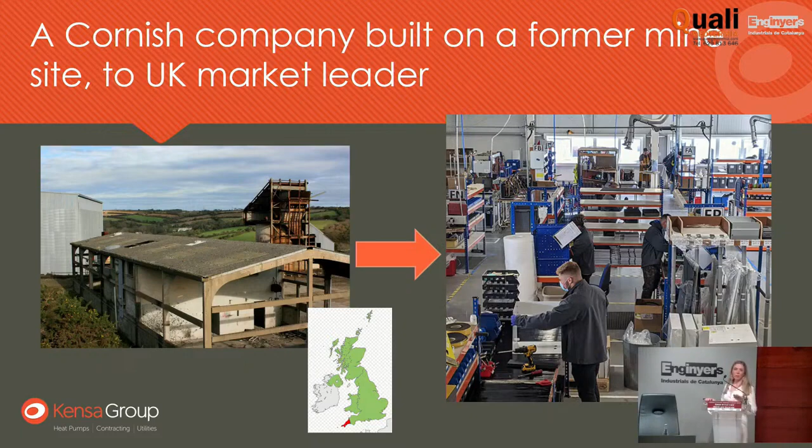So I work for a Cornish company, so we're right down on the very southwest of the UK, which meant I had a really long journey to get here because I live about 3 miles from this factory. Our factory in Cornwall, where we build ground source heat pumps, is on top of an old mine. There are a lot of mines in Cornwall, and that means that we're actually able to heat this new building that we've got on the site with water from the mines beneath it, which is actually really quite a cheap way of installing the infrastructure that you need for ground source heat pumps.

So the Kensa Group has 4 different companies. We've got our parent company. Kensa Heat Pumps is our manufacturing company. Now, we found, as many other people do, that if you put a heat pump into a house, you get a phone call saying, my heat pump doesn't work. But quite often, the issue is that the system has not been designed properly. It's not been installed properly. It's not been commissioned properly.

So Kensa Contracting was started so that we could do the design, the installation, and the commissioning, and that our customer had a single point of contact so that if anything goes wrong, they just speak to one person to get it fixed. The upfront cost of ground source heating is incredibly high.

Now, we want to reduce the barriers to uptake for this technology, and so Kensa Utilities was formed, and that's the part of the company that I work for. It's been created to fund, own, and maintain the ground array infrastructure that serves our heat pumps, and in that way we grow the market so that we can sell more heat pumps.

So Kensa started over 20 years ago. Initially, our market was the self-build market. That's probably very similar to the kind of installations that you have here on a regular basis in Catalonia, where it's individual properties. You've got people with quite a bit of money that care about the environment and that want to have the best heating available. So they install their own system. That's a very small market, and it doesn't help us solve the issues that we have of high carbon consumption.

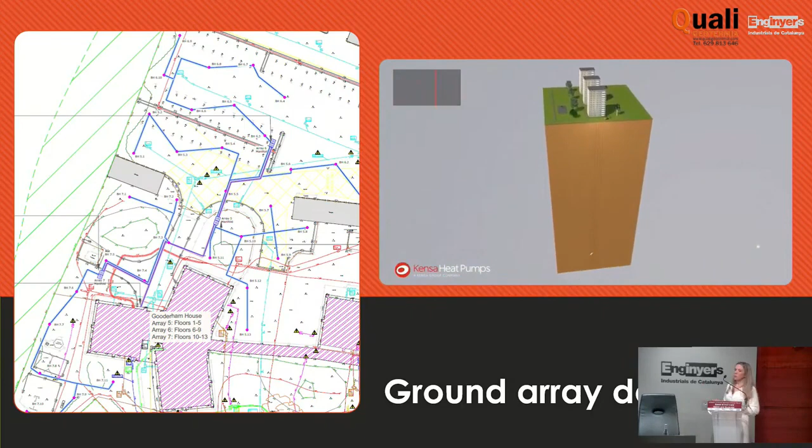They're incredibly deep boreholes, these ones. They're well over 200 meters because there's not very much open space and an awful lot of flats. And to give you some idea of the scale, this graphic on the right is actually a to-scale illustration of the depth of the boreholes compared to the height of the property. You know, we talk about 100 meters, 200 meters. It's actually a really, really long way down.

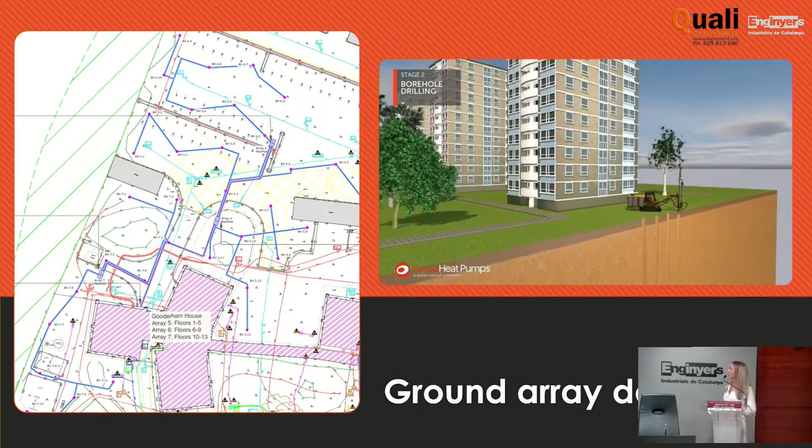Now, inside the building, you can see the feeder pipes are separated into 4 different arrays. And that means that we don't have to have a central pumping system on these pipes. So it reduces the maintenance cost and the ownership cost to the person that's managing this system. So you don't have to have an electricity supply to pump fluids around those arrays. And it makes the business model for this far more simple.

So the blocks of flats are separated into arrays. And you can see here there are 7 shoebox heat pumps, so that's our smallest heat pump, on each floor. That means there are 7 flats on each floor of these 3 blocks, and each array is serving between 4 and 5 floors of the building.

Most blocks of flats like this already have service risers, so we don't have to run pipes up the outside of the building. You can use the existing service risers, and we install insulated pipes up the centre of the building. Now, you've heard a lot about not insulating the pipes, and that's great when they're in the ground and they can gather heat. But once you come up out of the ground, if you don't insulate them, you end up with condensation on the pipes within the building, and you don't really want that. So the pipes up the service risers are all insulated.

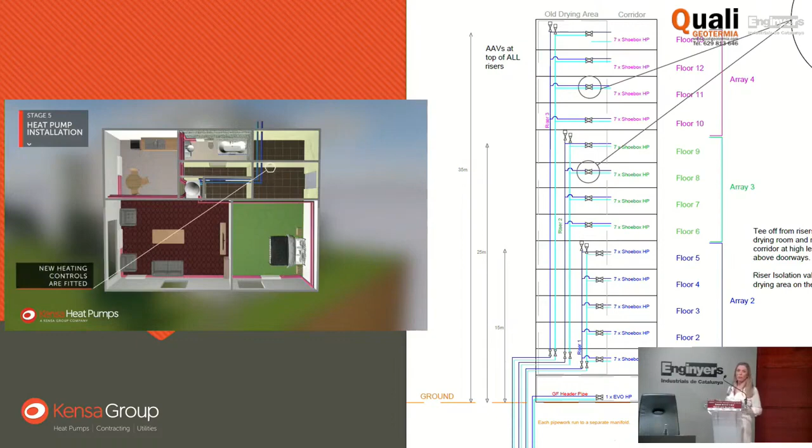But there are 5-way valves on each of these for every single flat, because when we fill these pipes with water, we have to pressurize the whole system. We have to pressure test it to make sure that there aren't any leaks before we switch it on. And it also means that we can isolate each individual section of that network. So if something goes wrong on one floor, it doesn't mean it has to affect all of them. And that's very important when you're looking at this kind of scale of project, because what you don't want is for the whole system to go down and to have 300 people without heat instead of 2.

So inside the house, these are images from this block of flats on the right here. That's our very small shoebox heat pump. It's a lot bigger than an actual shoebox, but it does genuinely fit under a kitchen sink. And that's really important when you're looking at high-density housing where space is at a premium.

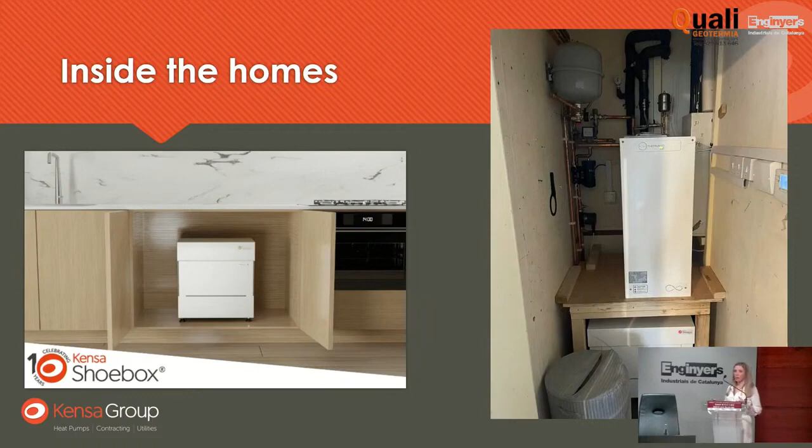On the right, the image is the shoebox heat pump underneath a phase change heat battery. So the heat battery on the right here is in place of a hot water cylinder, but it's about 1/3 of the size. So instead of using water for energy storage for your bath and your shower, it uses salt, which means that it can hold a lot more heat in a much smaller space. And again, it's really vital for smaller properties where space is expensive.

So this is the project in numbers, 273 flats across 3 blocks. That's a huge number of people that had their living conditions improved. These flats previously had electric storage heaters. So the people living in these houses have had their energy bills cut by more than half. And these are all lower income households, and that means we're taking them out of fuel poverty. They can actually afford to turn their heating on now, where many of them didn't before.

Also, with storage heaters, you have to remember to charge them at night to release heat in the day. It's not heat on demand. They can run out of heat, and so we had people that were cold in the evening. We know every single person in these blocks of flats is going to be able to have heat when they want it. There are 109 boreholes serving these flats. That's a very large amount, nearly 29 kilometres of drilling.

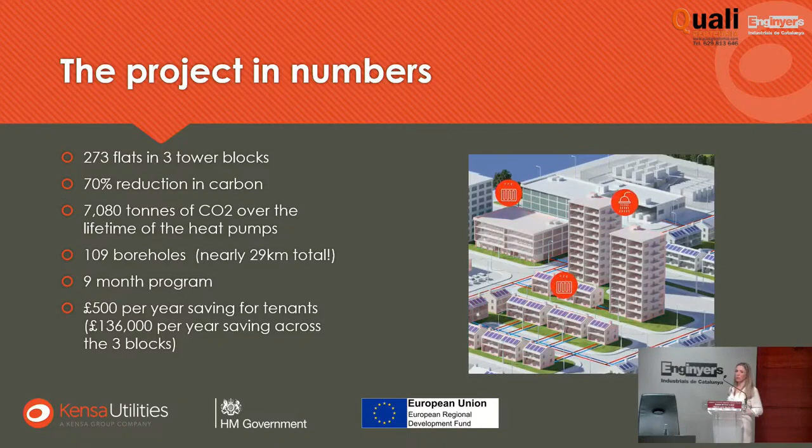The whole project is being done in 9 months, which is a fantastic feat of engineering. I think that's probably one of the most impressive parts of this project. And it'll save the residents £500 a year. And that is different to the way you would see it here. Our energy costs are higher than you have it in Catalonia, but it's still a reduction of over 50% to each of those households, which is £136,000 across the 3 tower blocks.

And this is just to bring it back to the fact that these are real people that have their lives improved. We've talked a lot about the engineering and why we might want to do it and why we might want to save the planet. And these are the actual people that are now able to heat their house and that couldn't before. We have them report that it's easy to use, it keeps their house warm, and it's much cheaper than the old system that we had.

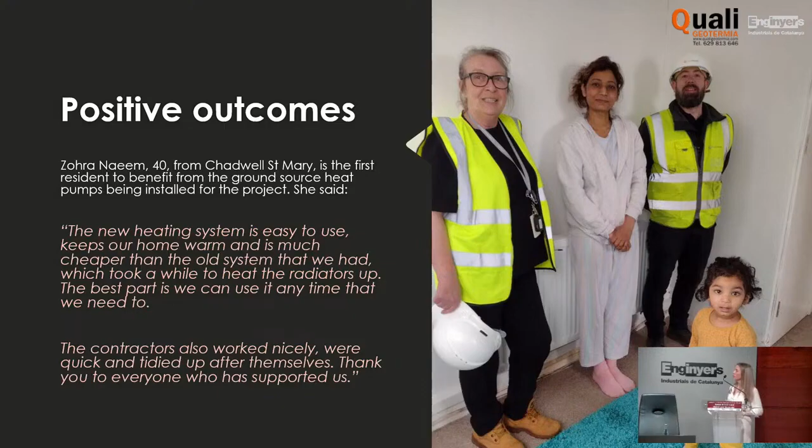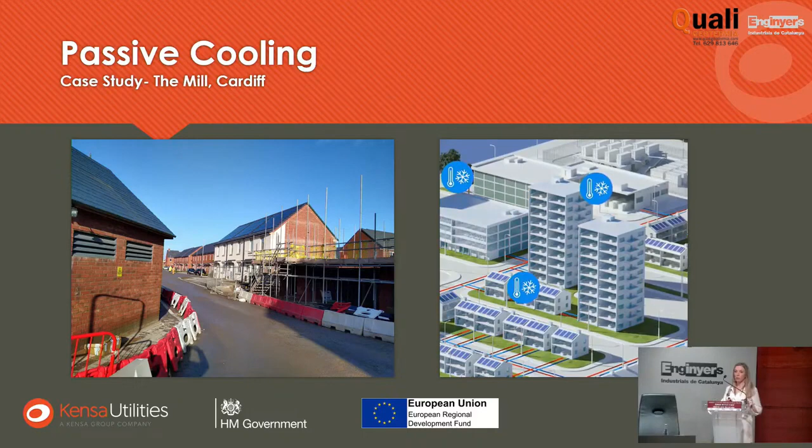This is from a new build development that we did, where we installed passive cooling in a property and a monitoring system to see how that behaved. So with passive cooling, you're just using the ground to cool the property. You're not using a heat pump. You're not switching the heat pump on to do this.

So we monitored this house between July and October last year, and it was through 2 heat waves, which won't sound very hot to you, but for us in England, it was incredibly hot. And it was at 32 degrees outside. Now, most homes in England don't have any cooling, so that is really quite warm. The room that we installed the cooling in was maintained at 21 degrees Celsius, and that's without turning the heat pump on. That's just using the ground and dumping the heat in the borehole.

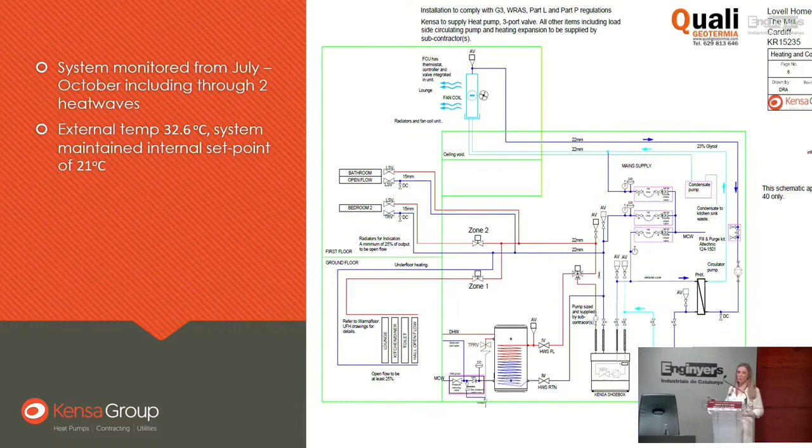And this is the unit that you require. This is just a plate heat exchanger on the bottom, a circulation pump for the ground side, and a circulation pump for the domestic side. It's ridiculously simple. So the running costs for a single room were £1.14 a day. To put that into perspective, if you were to cool the same room with air conditioning, it would be £4.25. So it's about a quarter of the price.

And the reason for that is that all you're doing is running 3 pumps, 3 motors rather. You've got these 2 circulation pumps, and then you've got the fan coil unit. That's the only energy it requires. If you were to cool the whole house over this period, it would have been £378 with this model, and £1,409 if you used air conditioning.

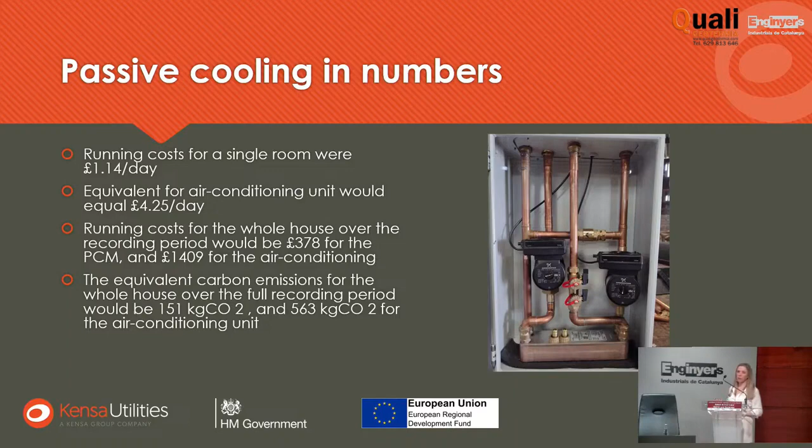The benefit of this as well is that you dump the heat into the ground, and so when you run heating in your home, when you create domestic hot water, you're actually getting that much cheaper, because your heat pump will be able to run more efficiently because it's doing less work to upgrade that heat when it comes in, because you've warmed the ground. The other benefit is it's about a quarter of the carbon as well. So your impact on the environment is far lower if you're using passive cooling compared to air conditioning.

A little bit more about the business models. So you can see from the passive cooling how that would be appealing to homeowners. It really helps us to sell this technology, that it's lower cost, so it's more desirable. And this is really what we're trying to do to expand into that market.

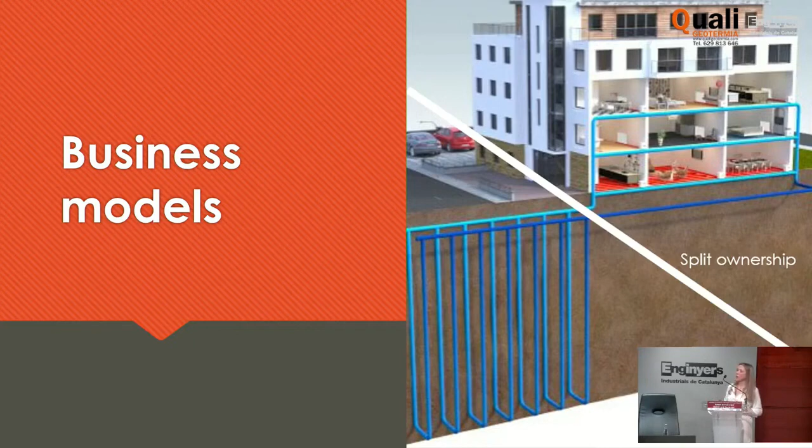The next biggest thing that we can do is to stop selling our customers this infrastructure in the ground. So up until now, Kensa Contracting has been selling the whole system to landlords and to developers and just handing it all over. If we remove that bit of it, if we absorb the upfront cost and then charge households for connection, it makes it easier for these projects to go ahead.

So our vision, and we haven't called it Thermonet, we call it networked heat pumps, which I'm not convinced is the best name for it, because people tend to want to be their own little castle. They don't want to be connected to other people and at risk of failing along with them. They want to be independent. So I kind of think calling it networked heat pumps makes them feel part of something that they probably don't want to be a part of.

So we do particularly want an individual heat pump in each home, and that's why we have such small heat pumps available on the market. It's mimicking the gas network. Now that's very important for us in the UK, because currently in the UK, 85% of homes are heated with natural gas through the gas network. So people are very familiar with that model. They don't want to change. And we don't want to make it seem difficult to them. So if we replace one network with another, it's quite familiar.

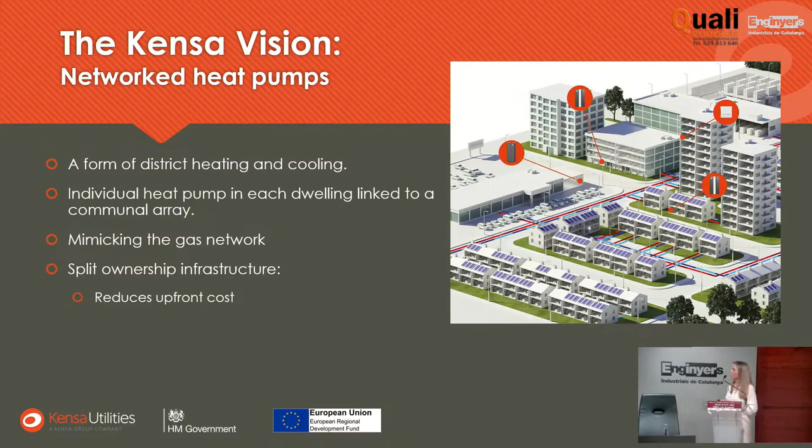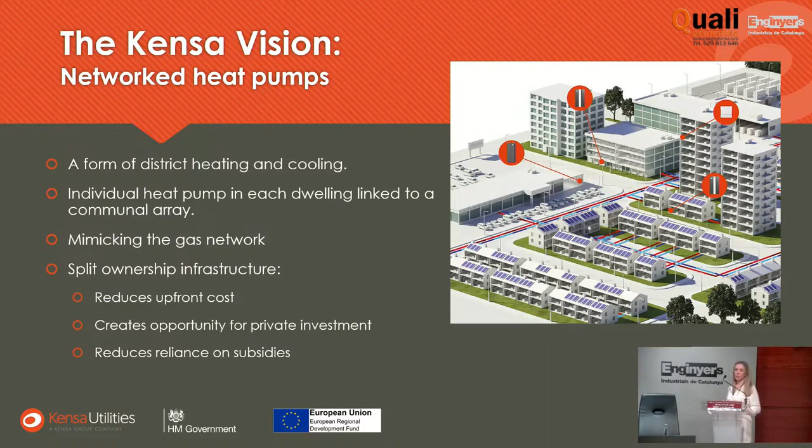Kensa Utilities is selling split ownership infrastructure. So Kensa Utilities will own the infrastructure up to the point it connects with the building. And that reduces the upfront cost by 30 to 40%, depending on what market we're working in. It creates an opportunity for private investment. So instead of relying on government subsidies, which change annually, we can actually create a longer-term business model and more stability in our business by using pension funds and other investors.

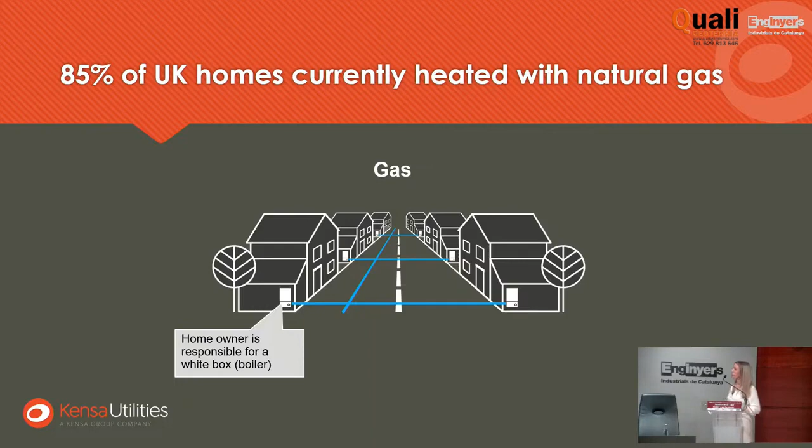So, yeah, 85% of UK homes are used to this kind of setup. They own the boiler in their house, they connect it to the gas network, they don't care how it works, they just have a lot of heat. They don't care if it's particularly efficient, because it's always been really cheap. We want to do the same thing, but with a low carbon alternative. Now at the moment it is expensive, but we expect that to come down as the momentum increases, as the market grows, and having more drillers, more installers, this cost is going to come down.

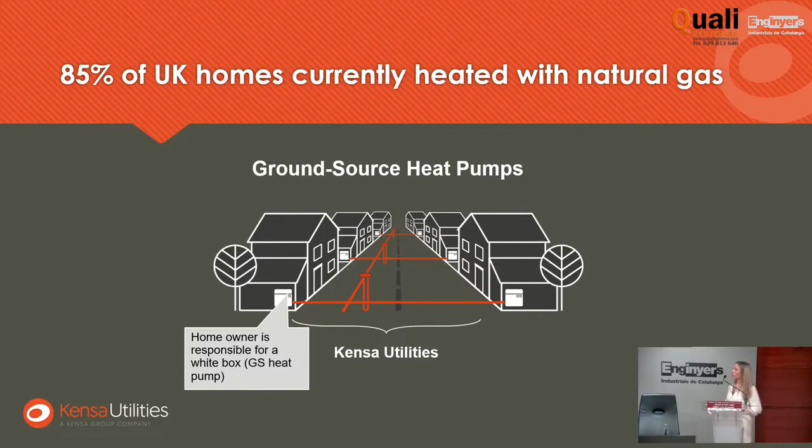The other thing that we're doing is, unlike a high temperature heat network, there is no heat metering. So we don't have to have that additional piece of equipment in the house to measure how much heat they're using, and that reduces our cost for administering the whole system. It also reduces the complexity. So this is a very simple business model. The cost that we charge is a flat rate standing charge. So the household knows what their bills are going to be, and we don't change that. And the purpose of that standing charge is just to repay the capital investment. So it's simple. Everything that we're doing is to try and keep this simple.

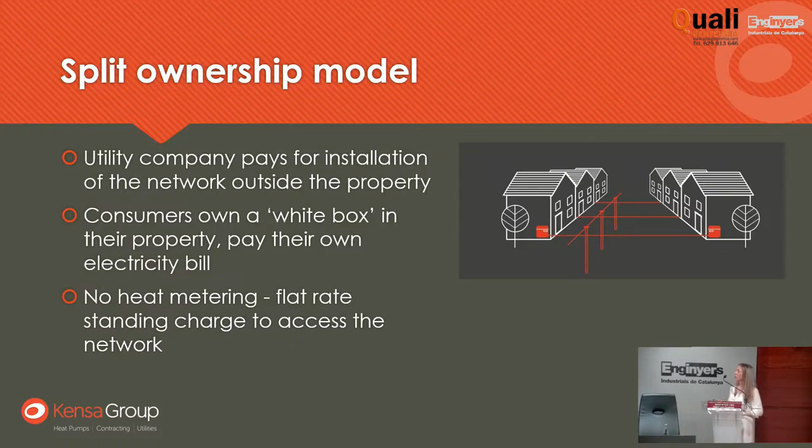Right now, we're not even particularly looking at introducing more waste heat into this system. It's complicated and difficult enough to get simple systems like this off the ground. We're just doing boreholes, we're just doing a flat rate standing charge, and we're bringing in the private investment to do that.

And this now is the project that I spend most of my working week on. It's called Heat the Streets, and it's been part funded by the European Regional Development Fund. In this project, we're installing 100 heat pumps across 5 different sites in Cornwall. All of those are with split ownership. Every single customer is paying us a monthly standing charge to use our infrastructure, and we have installed a heat pump in their house that they own. They can change their electricity provider, they can manage their own heating costs. We're also installing the infrastructure for future connections.

And this is what it looks like across the markets that we're working with on Heat the Streets. Now, bear in mind that these costs are heavily subsidised by the funding that we've got. In new build, the developer gets ground source heating for the price of air source, because the equipment in the house is very similar. We haven't got an external unit, and they're not paying for the infrastructure. So we get cost parity with air source, which is a big deal in the UK. For social housing retrofit, that's our public housing, again, it's ground source for the price of air source.

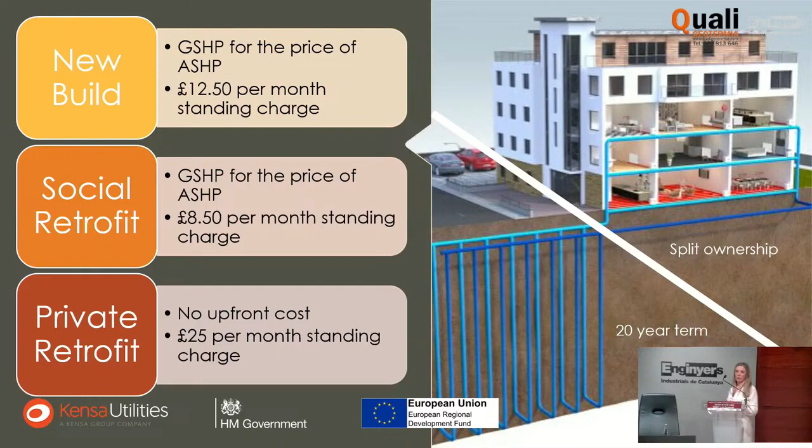And why would they do it? So for new build developments, it reduces their upfront cost without increasing the cost of running the system to the household. So you get a more attractive heating system. You don't have an ugly box in the garden. We haven't messed around with the pricing to make it harder for them to sell the houses later.

In social housing, the social housing landlord isn't responsible for infrastructure, which to them makes their job much easier. They don't really want to be responsible for maintaining infrastructure serving their properties.

And for private housing, the upfront cost barrier is removed, and they don't then have to go and try and navigate the low carbon heating market. They don't have to work out, is hydrogen coming? Is an air source heat pump better? Who do I go to? Who's going to install it? And we found those are in fact the biggest barriers in the households that we looked into in this project.

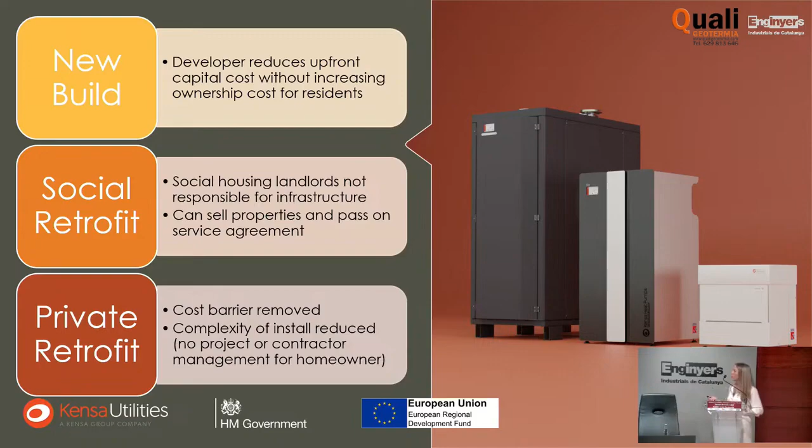And this is the really fascinating bit about this project. So you've seen in the presentations earlier today, people talk about borehole fields. Well, we've worked in an area here where there isn't a space to do that. Instead of using a borehole field, we're installing the boreholes in the road. Now, there aren't many places that don't have a road, so there aren't many places that you can't decarbonise.

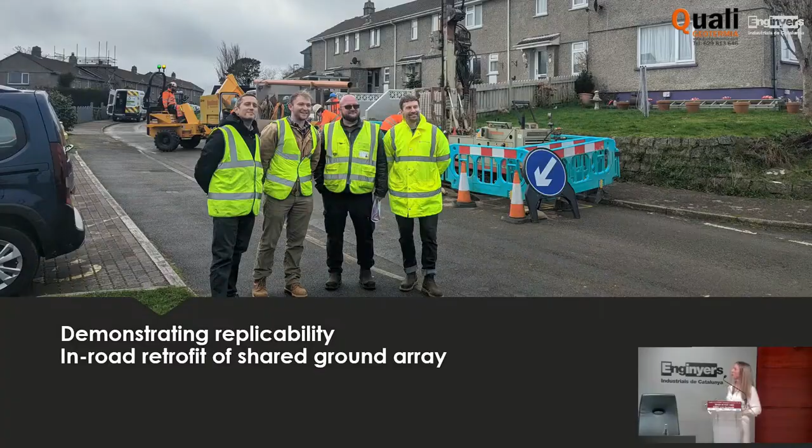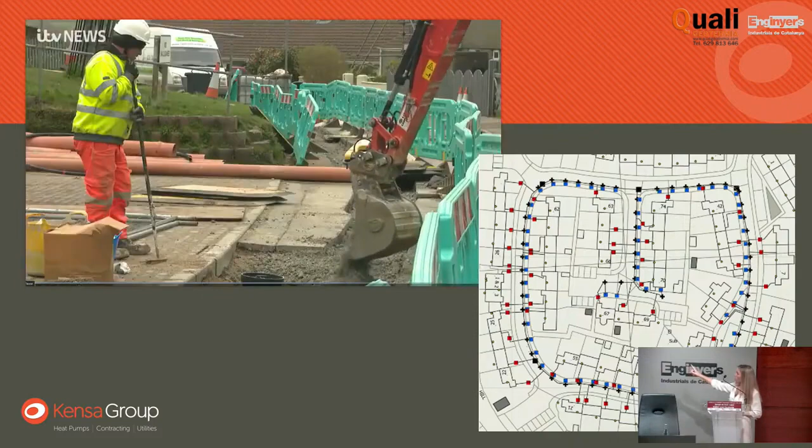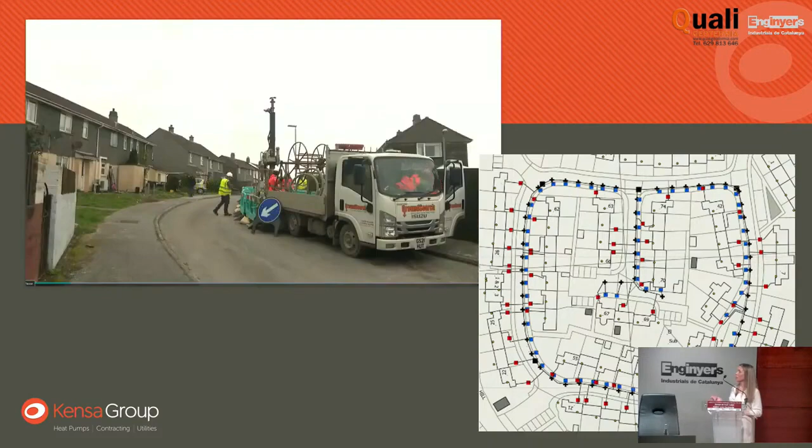The video on the left is just a few clips of the works. So we're trenching all around the estate. As you can see, this is the housing estate here. Each of those red dots is a connection for a house. And each of the black crosses is a borehole. So we've had to work around the existing utilities that are in the highway. We had to get planning permission to do this. The local authority was really worried we would freeze the road. We're really not going to freeze the road.

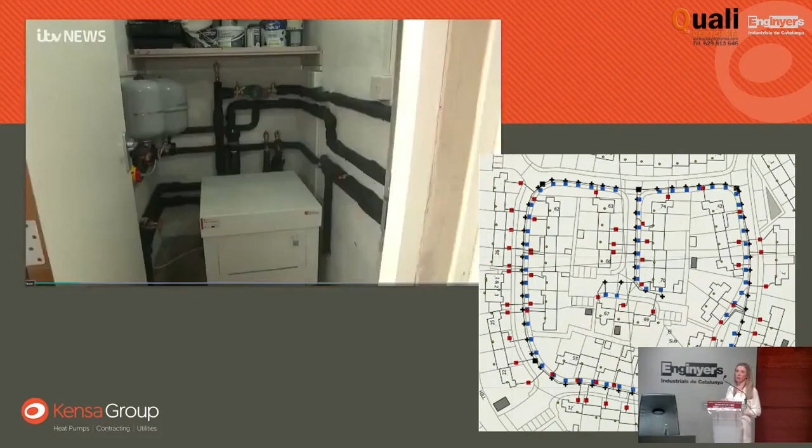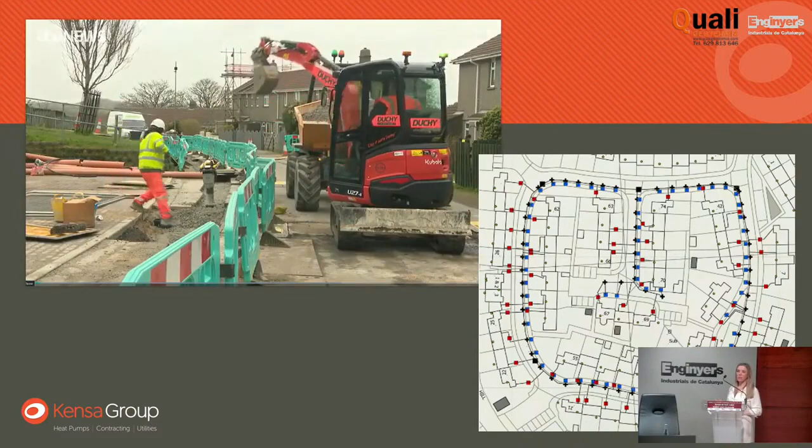During delivery of this project, we will install 20 ground source heat pumps in this estate, and there'll be 40 connections in place for the rest of the houses to join up to it later on when their heating system breaks. And that is really what we think is going to be the future of Thermonet in the UK. So exactly like our current utilities, you install it in the road, you put a connection in place, and then when your heating system breaks, you can put in a new one and connect it to that network.

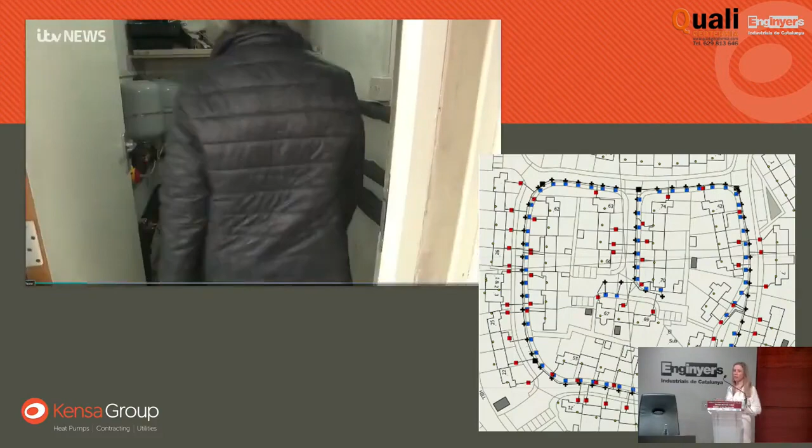The biggest part of work that we've had to do on Heat the Streets is actually creating the operational parts of the business that were required to deliver this. So we have to have a set of legal agreements in place so that we can protect our income on this asset through the future. We had to set up customer accounts and billing systems, and none of this was part of the Kensa business model before. So it really has been a huge amount of work.

Gaining permission to work in the road has been difficult. We had to install temperature sensors in the road at various depths so that we can report back to the council that we are not freezing the road. I actually think that's going to be quite an interesting study that people are going to be keen to see, because we talk about the flow temperature in the infrastructure and the temperature of the brine, but we don't often look at the temperature effect at various distances from the infrastructure. So we're going to have quite a lot of data come out of this project.

We are not regulated in this industry in the UK, but we're joining a voluntary regulating body called the Heat Trust, and that is just a way to promise to people what they can expect from this, which is important when people are unfamiliar with the technology. They shouldn't need to understand it inside out. There should just be protections in place so that they can trust you to do a good job.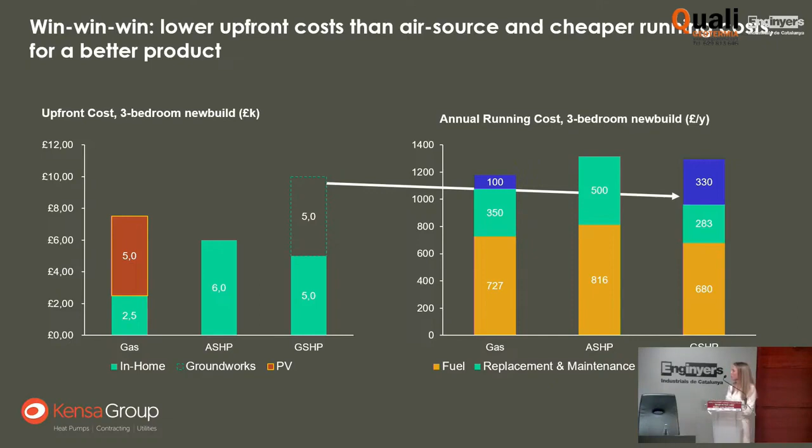People will put up with the disruption as long as they know what to expect and how long to expect it for. And we're digging up the road and drilling holes in front of their houses. It is a disruptive process. We had to remove all of the radiators from their houses and replace them with larger ones. Half of them have already reported energy bill savings, and all of them said that it was a better heating system than they previously had.

And another crucial issue is every one of these had to sign a 20-year service agreement with us. And we were told that people wouldn't do that because it would make it too hard to sell their house. We've already had 30 homeowners sign that 20-year service agreement. 60% were comfortable with it and 40% were ambivalent. Nobody was saying that that was a big barrier to signing up. 80% have said that they'd be happy to pay an upfront contribution to the internal works, and that's what I'm relying on for my next project.

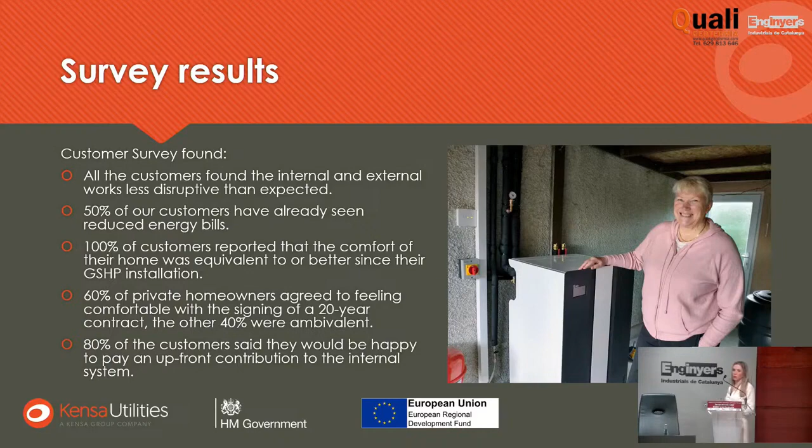And this is just a short video interview with one of the people that's receiving a heat pump in Collins Park, where we're working in the road.

When we had the opportunity of Heat the Streets in our village, we knew that actually that was the system that we would dream about owning, but we didn't have the spare cash to be able to buy it. That was our dream system, and when this came along, it was an easy yes to get involved with it, because ultimately that's what we would have loved to have been able to afford all by ourselves. So we're delighted. I'm looking forward to getting rid of my oil tank, which I look out of my window at from my lounge. So I'm looking forward to getting rid of that and knowing that the ground source heat pump is going to be installed and it's going to really complement the solar that we have. It's just going to be a really big leap to reducing our carbon footprint, and I think that's really important for our future.

And I'd just like to end with saying it seems like a really difficult problem, and it is. But if you have an organisation that will run these projects, that will get the funding, that will organise the households to all work together, it is possible, and you can do it, even in high-density housing areas. There's always a way, and I think we've really shown that by just drilling into the road.